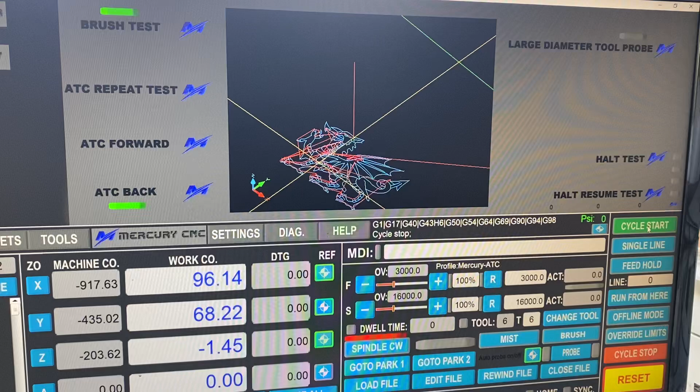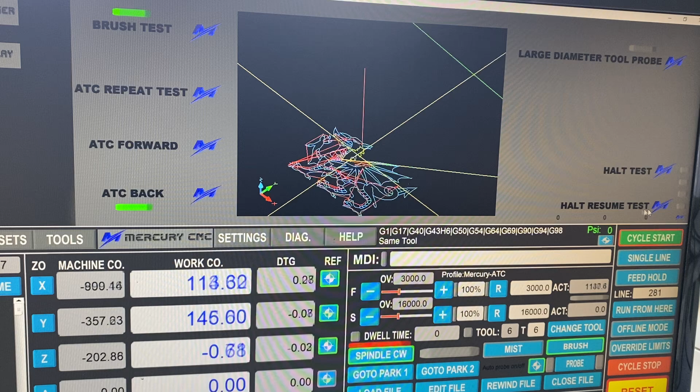This is what happens when you walk into a safety zone on one of the Mercury CNC routers. Okay, I'm using the halt test and the halt resume test buttons, which are on the right hand side. And you can see we've got some code running. So you can see that there's movement in the DROs on the left hand side. And this is the job that is running.

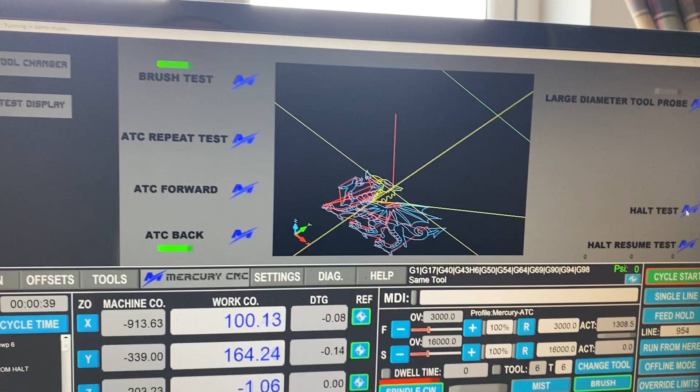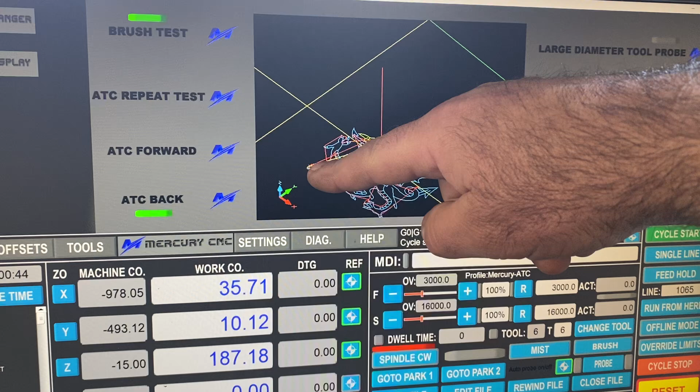Now, if somebody walks into one of the light barriers or onto the safety mat, this is what happens. So, bear with me a second. So this is as if somebody's walked onto the safety mat and the spindle stops and the Z rises up. Okay, so these crosshairs are the tool point at the moment. Right, so it's raised away from the work.

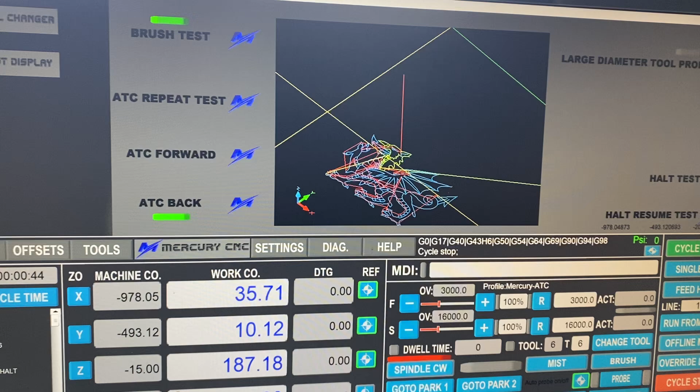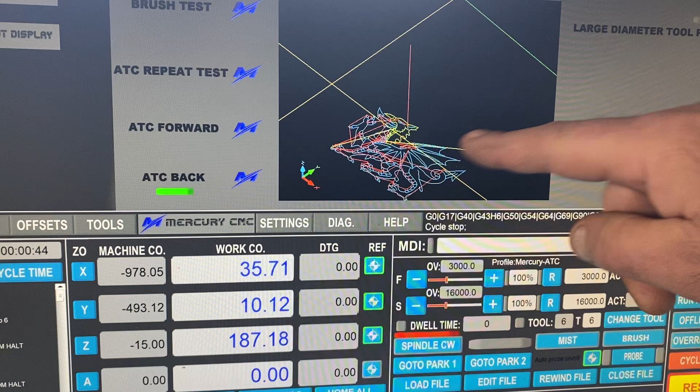While it's up, now the machine is totally safe. There's no movement here. The spindle's off, the brush is up, and the head is right up out the way at -15 away from the home switch. Okay, when we resume that, the spindle comes on, the brush goes down, and then the machine goes back to its original start point and carries on its job. So it's totally restarted the job exactly from where you left off.

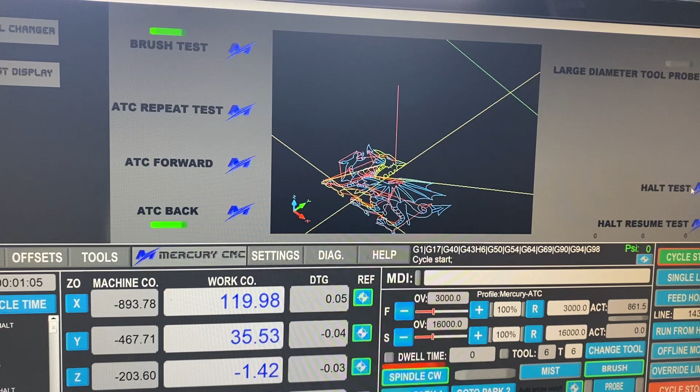So the halt test would be the safety mat, and the halt resume test would be a button on the post on the way out of the safety zone, which you just press once you've left the safety zone. Okay, let's just put it back in the halt test.

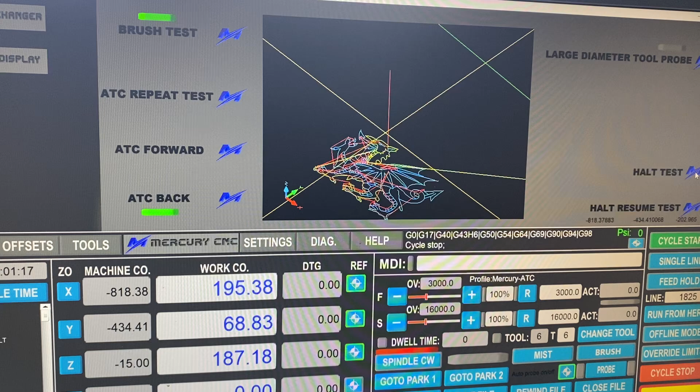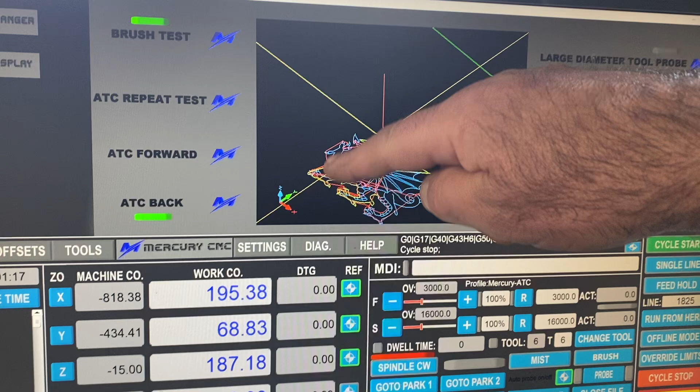I'll show you a nice little feature, which you can't do on most controls, but you can do on this one. When it's up there, the usual reason for an operator walking in is if something is not quite right, or if you have a piece that's tipped up or a bit of debris which is in the work area that needs to be removed out the way.

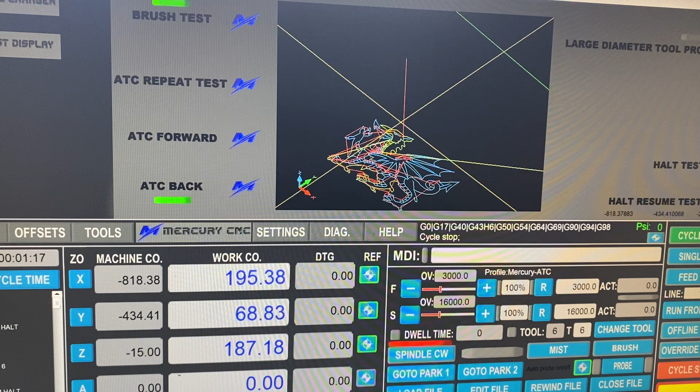Okay, so the operator will often need to jog the machine out the way, so you can see the crosshairs moving. That's where the head position is, and we can jog it out the way. Or you can do that with the wireless handset controller, or you could send it to a park position. So we'll just send it to a park position. So that's right out the way, that's the head right at the back of the machine. So you can now clear the job.

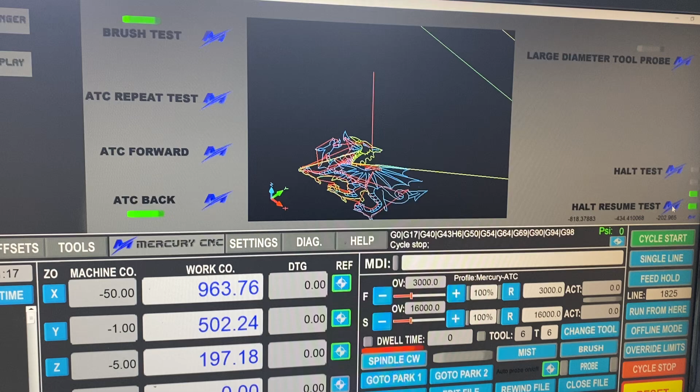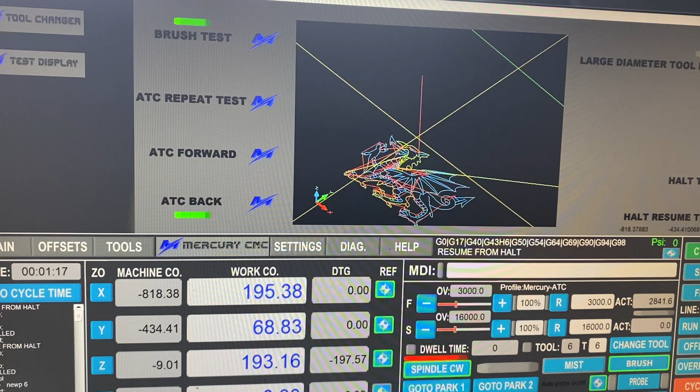And then when we go back in to resume, this is just pressing the post button on the way back out of the safety zone. And you'll see the machine comes back into its original position, switches the spindle on, takes the Z back down, back to the start position, and then continues this run.

So that's basically how the light barriers and safety mat are set up and what they will do on the machine. Okay, thanks for watching.